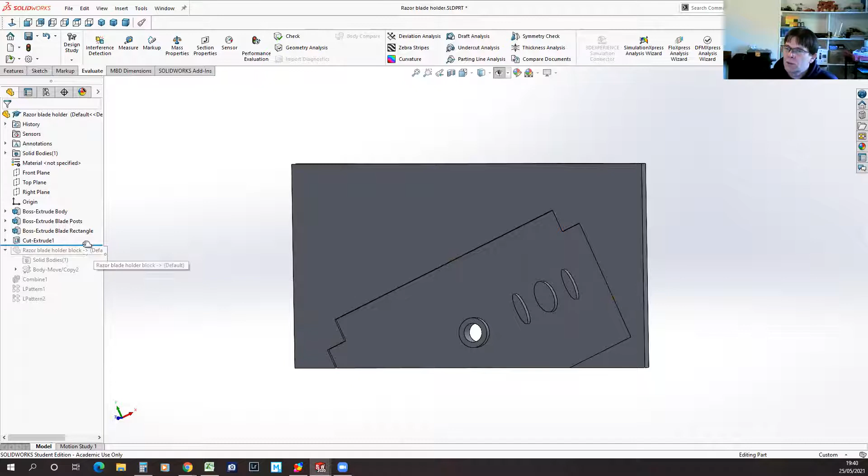And then I started looking at how to give it a profile that would enable you, when you were using it, to hold the razor blade so that you could put your finger to put downward pressure, towards the top of the razor blade. And what we ended up with was this shape. So I thought I'd start with how to generate this curved shape, and then we'll look at how I applied it to the existing model.

So if I go to the part where I actually drew that, this is the sketch that cuts that shape out of the block, and the sketch is using a spline line. So I'm going to start a new part and draw one from scratch. And we'll design this how would make most sense in hindsight. My part actually evolved over several iterations and ended up being drawn in a slightly complex way.

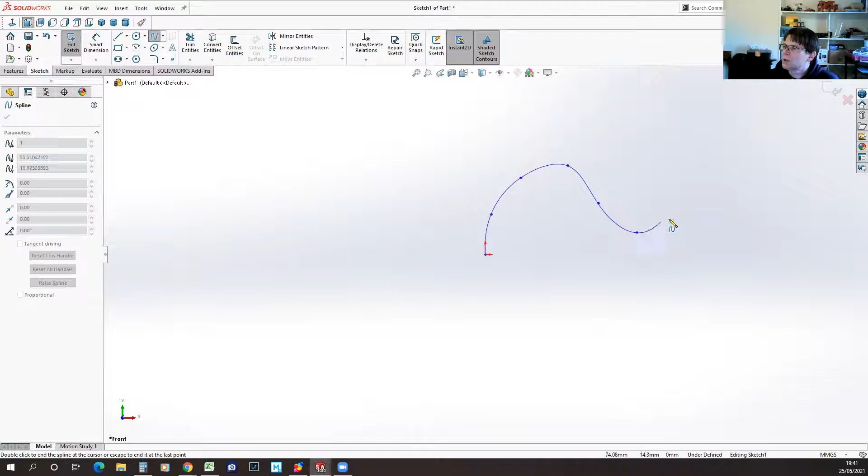So we'll start with a boss extrude, which I'll put on the front plane. And I now need to draw the shape that I want. And when I select the spline, what I can then do is click, and you can see that a spline is a curve that joins between points in a smooth manner. And I double click to finish.

And because I need a closed shape, I'll just join up those with a straight line. And then I can exit the sketch, and that can be extruded into a solid. So the spline enables you to make these very free-form organic shapes.

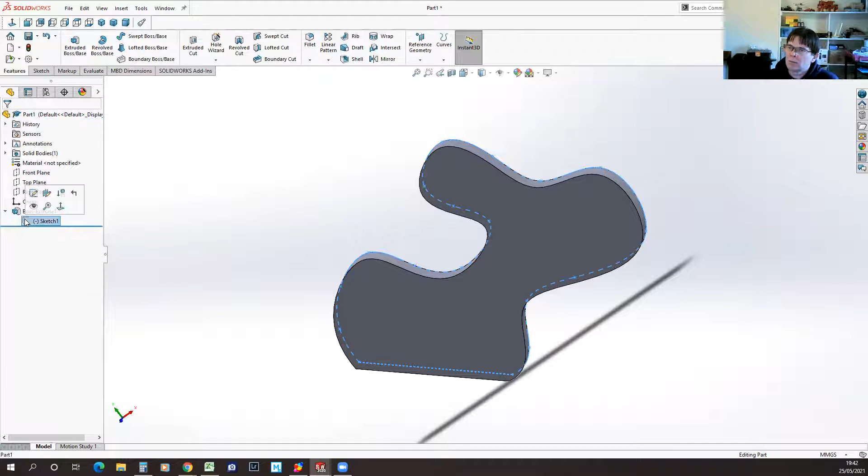Now, as is often the case in CAD, if I just go back in and put a dimension on that bottom line, if once you've drawn your shape, you decide that you want to change that dimension, there's no predicting quite how the rest of your shape is going to adjust when you've changed one aspect, if all of these other points aren't fixed.

So our endpoints are attached to this line, so they've obviously moved apart to match the change in the dimension. The rest of the spline, there's nothing fixing any of these. And so you can end up with a lot of points which you need to drag to adjust to kind of reshape.

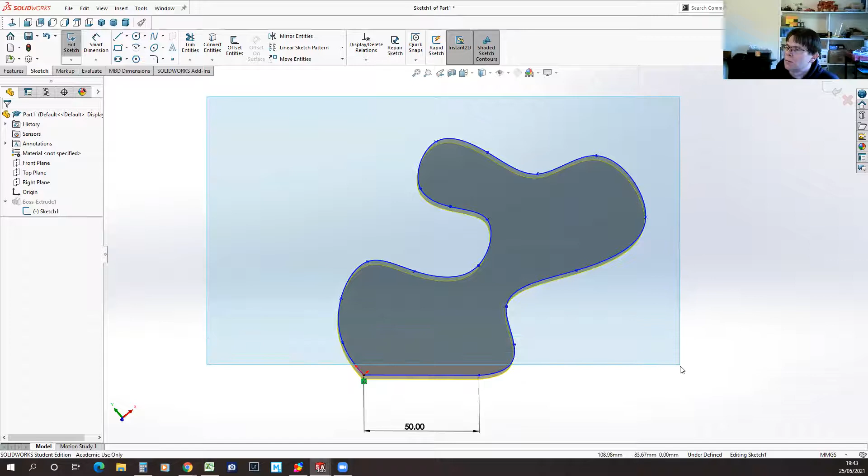So I've drawn a lot more spline points there than we had in our original model. I'm going to delete that and redraw a more sensible spline. So we had a shape that had a slight indent for a finger to go into, and then came down to a point like that. I'm just going to get rid of the dimension.

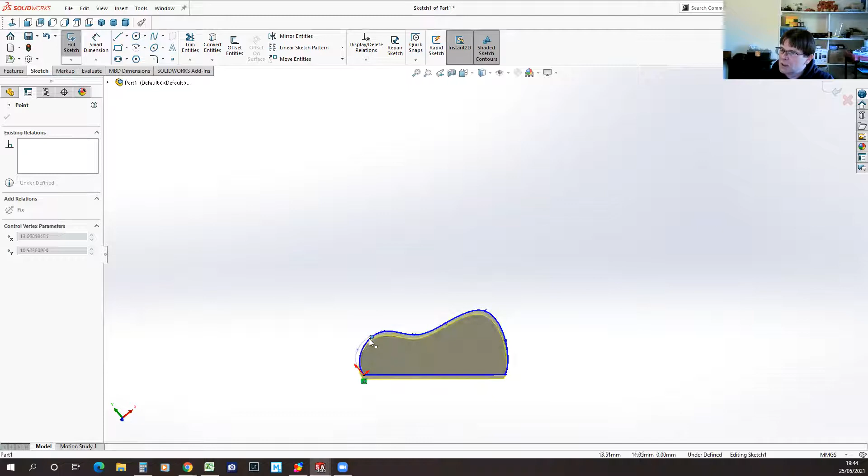Join that up. So what we want to do is constrain our spline. First of all, we want to essentially make the adjustments to get the shape a little bit more how we actually want the final part to look. And that's the nice thing about splines, is they're very adjustable.

I'm going to make that line horizontal to lock that. And it's not happy because that line isn't horizontal. I just realized that I've managed to rotate my axis. That's actually horizontal. And to try and rotate and move this whole shape now becomes quite cumbersome and painful.

That's interesting that you can't just select all of them and rotate it. Yeah, I don't know if that is possible. It would be really handy if it was. I've definitely found with splines, you save a lot of work if you get them kind of roughly right the first time.

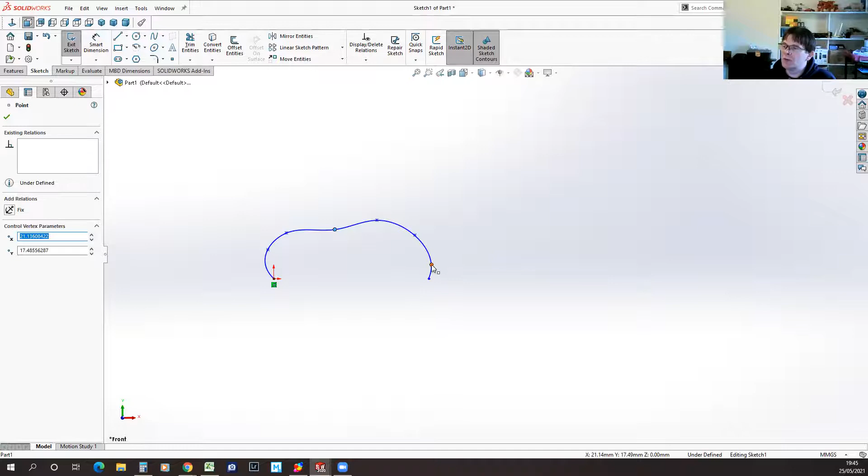Have you tried using something like Illustrator to import the lines and shapes and then extrude from there? I haven't. I don't know, there's a whole area of SolidWorks I've not played with, so it may well be that there are ways to import SVG or other vector drawings. I use Inkscape, the free vector graphics program, and that has really nice spline curves with adjustable curvature points, the types where you just click and it auto smooths everything between them.

Sure. Let me just put the dimension back on there. About 55.

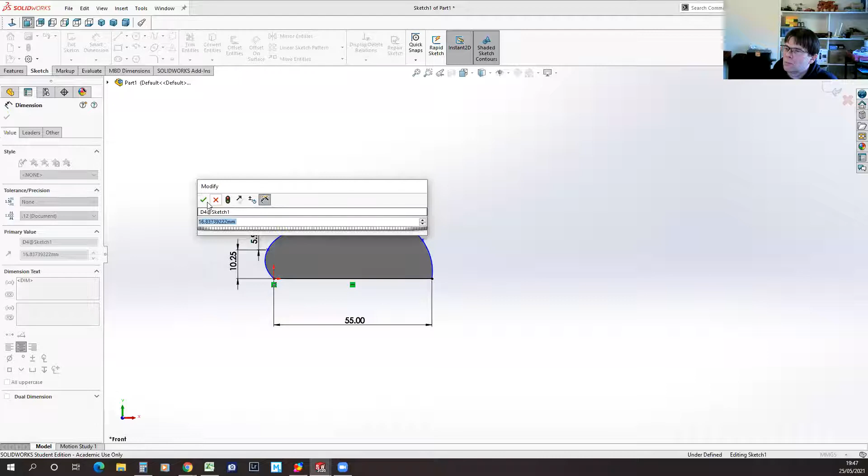So if you want to completely define your shape, then what you actually need to do now is dimension all of these points. I won't do them all because it'll take a while, but they need to be dimensioned in both directions to fix them. You'll see that when they're fully defined, they'll go like other shapes, from blue to black.

Just zoom in on that one. So that one's now a black cross at that point because it's fixed with respect to the origin. This one's still blue, I've fixed it horizontally with respect to some points, but you get the idea. You need to put dimensions to both its horizontal and vertical position in order to fix it.

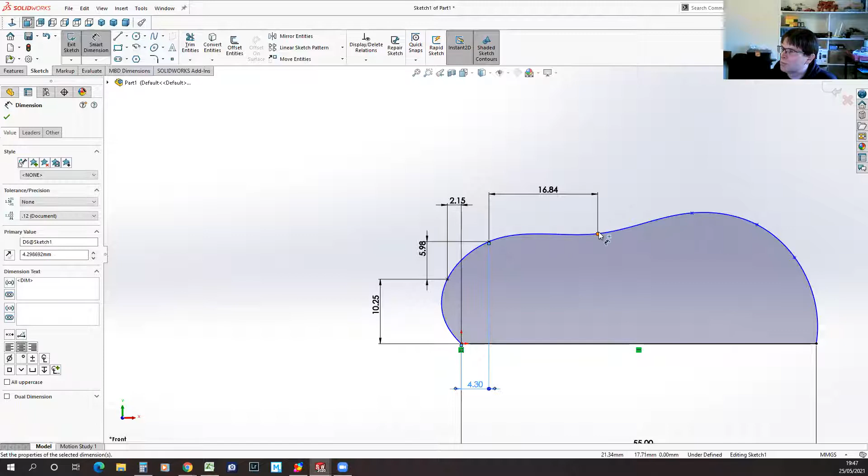And then once they're all fixed, the shape will behave more predictably when you adjust it. Now, if you want to actually make things scalable, then you need to start using equations, and say that if this length, we define this length as a variable, then we could say that this piece should be maybe a third of the way along this length. And so we define the dimension from here to here.

We define the dimension from there to there relative to the value we'd use for this dimension. That's something we went through in a previous session about using equations, so I won't repeat that now, but we'll look at equations towards the end of this session on another part. Let's assume we've made this part fixed enough.

We're happy with its shape, and I'm going to make it a little bit thinner. I don't want it to be quite that thick. So the sensible way to design this part now would be to save that as our overall shape. I'll do a save as, and I'm going to call it template shape.

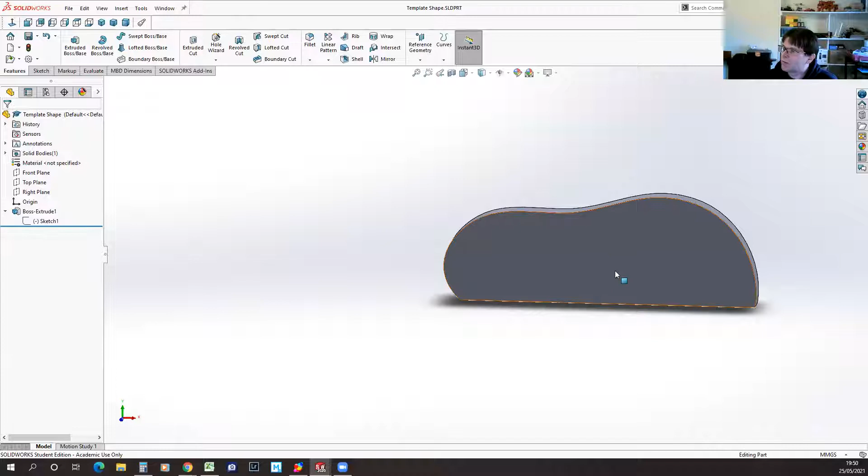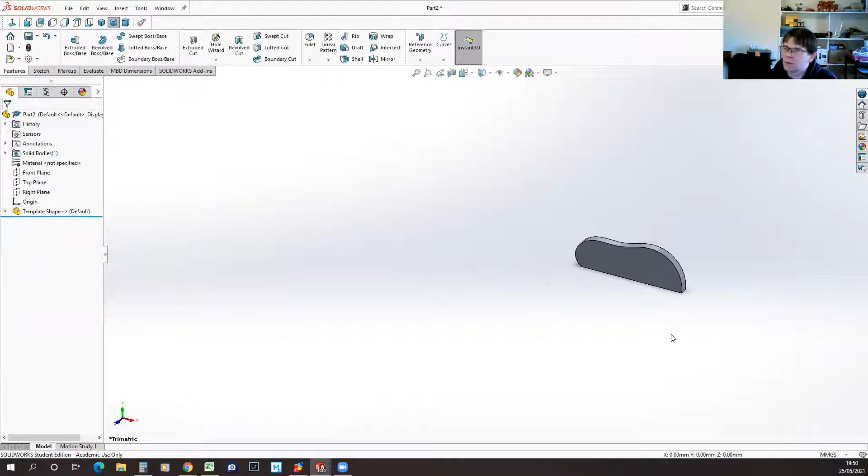Now what I can do is go into a new part and derive it from this part. So I'll start a new part, and the first thing I'm going to do is insert my other part, my template shape. It's asking me to mate it, so I'll just fix that corner to the origin, so it's happy that it's defined in space.

So I've now got a part derived from my other part, which means that first part I designed will dictate the shape of this part. Now I can start putting on the other features that will enable me to locate things. For our razor blade, we had a cut in this face, and I'll keep it simple and pretend it was just a rectangle. We'll define some dimensions to fix it in place.

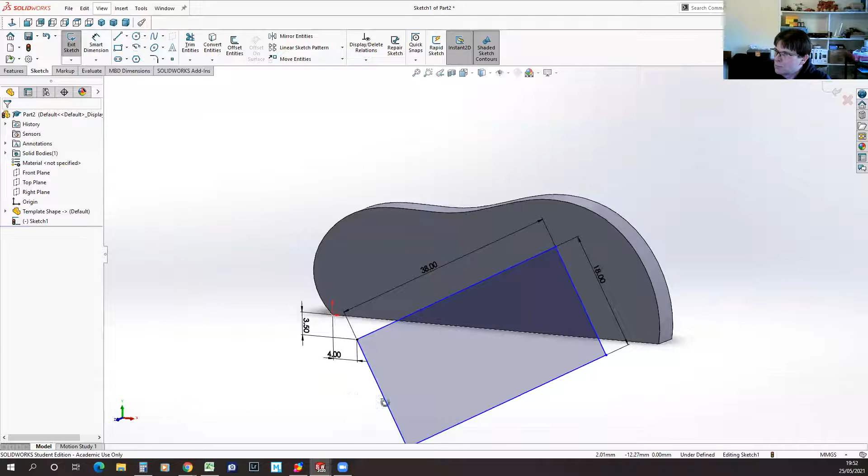It's looking for an angle because I've constrained its size and position at that corner, but I haven't constrained the angle of tilt that we've got it at. So let's put it at 150 degrees. Now it's fully defined, so everything turns black and it says fully defined down the bottom.

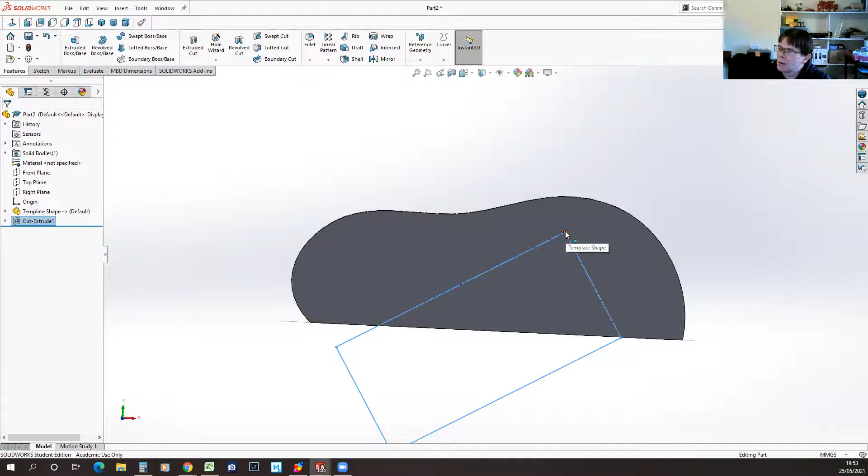Exit that sketch and make it go 2 millimeters in, just so it's more visually obvious what we're doing. Now all of the other parts which came on here were to enable us to locate the razor blade, and I had corresponding parts on my other half. I'm just going to go back in and adjust some of these.

Go in and edit the sketch properly. So I've just moved that point up and I'm going to increase that angle. Now I've put this angle on and everything's constrained, I should be able to rotate this, because I've defined that these lines are all perpendicular to each other. So it's a rigid rectangle, and this angle is the only thing controlling what angle it's at.

That's a way you can do a rotation after you've sketched something. Without the constraints, that wouldn't be possible. I want to make it a little bit thinner. There we go. That's just to give me a bit more space to put in the other parts.

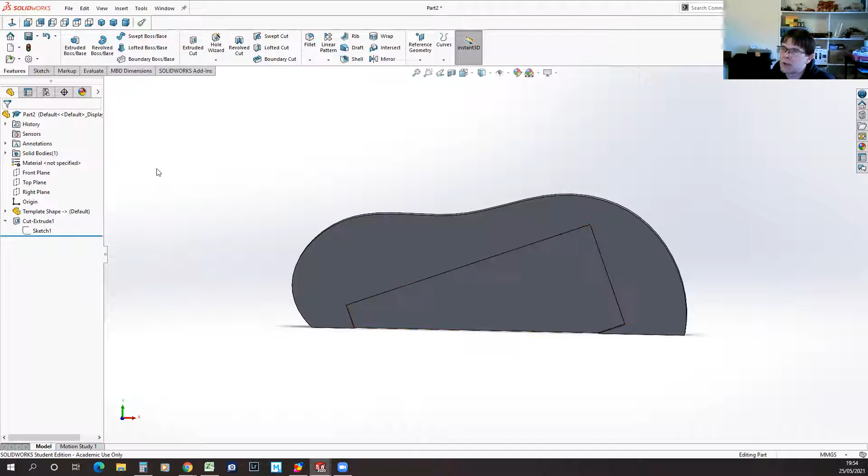The other things I had were some protrusions that would hold the razor blade in place, which I would do through an extruded boss. But because I want to actually have equivalent parts, if we go back and look at my original part, just let me shrink my windows down a bit. I've had these open on a bigger monitor.

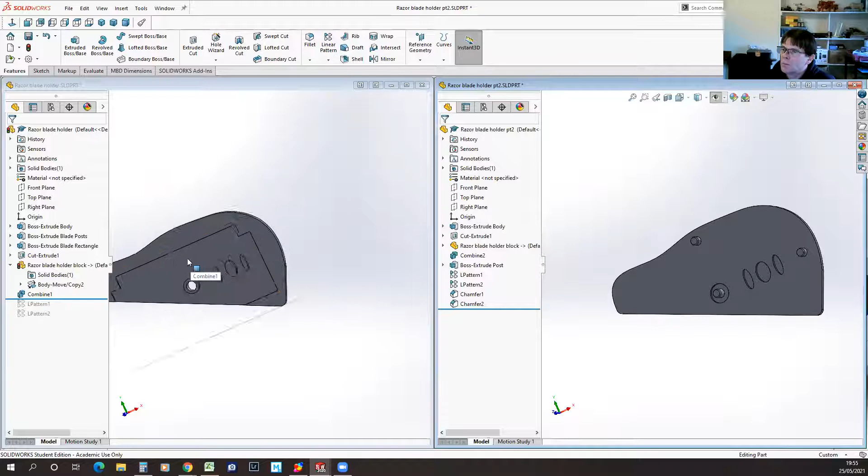Oh, I've rolled back a dependent part. Look at that one instead. So you can see these two parts, where this one's got things that protrude out, and this one's got things that protrude in, so the two plug together. That one's also got some features rolled back. So I've got these holes and I've got these pegs.

Now I want all of these to align between the two parts. And because I was just designing this on the fly, I did probably what most people would do, which is I defined them by putting dimensions on. So on this part, I said they're 24 apart, and when I was designing this one, I said they're 24 apart as well. But there's no link.

So if I went in and made those 24 and a half, on this part, they're still 24 apart. And so now my two halves don't line up, which is not ideal because you've got to keep all of these dimensions in sync between multiple parts. So a better way would be to add these onto our derived part as well.

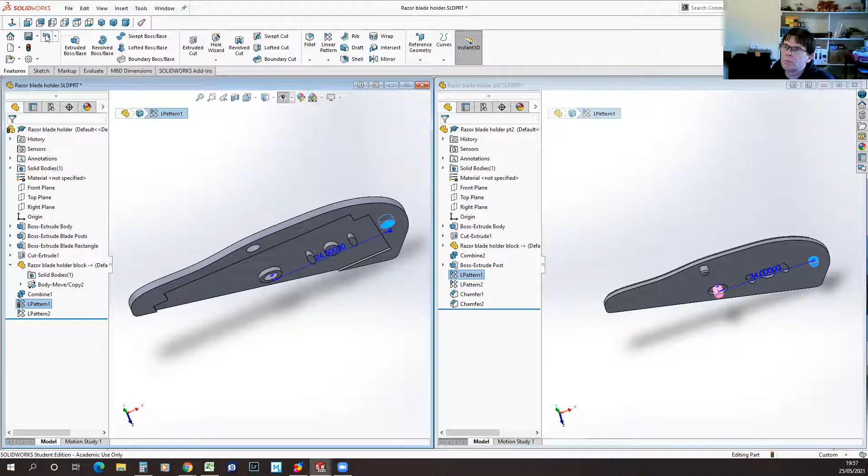So if we go back to our original template shape, what I'm going to do is put a sketch into it. I'm going to create everything as construction lines, so they're not going to actually be used for making features, but they're going to be used as a reference for attaching things. So I can make them for construction before drawing them.

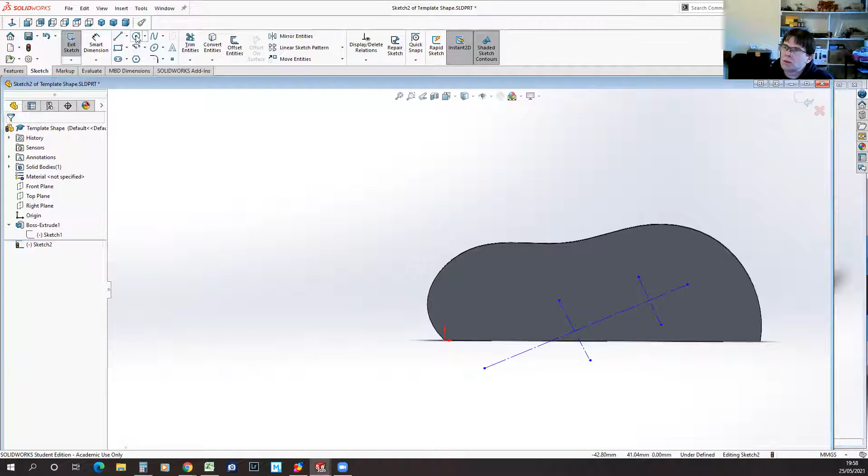Let's have a line there, and another line there. If I wanted things to all be exactly the same diameter, I could also do the same thing with some circles. Now I need to put some constraints on these so they're all fixed.

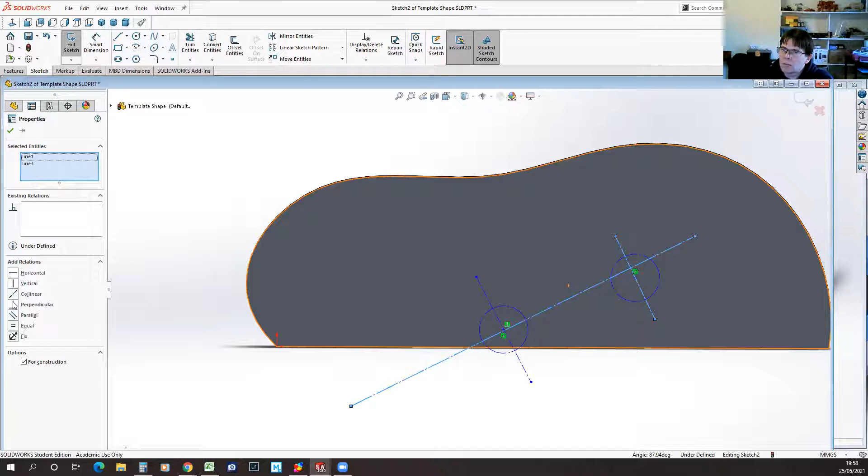So I want those to be perpendicular, and those to be perpendicular. I want to make sure that my circle is where those join. Oh, that wasn't what I intended to happen. Coincident, there we go.

So you can see as I start defining things, they turn black as they're fully defined.

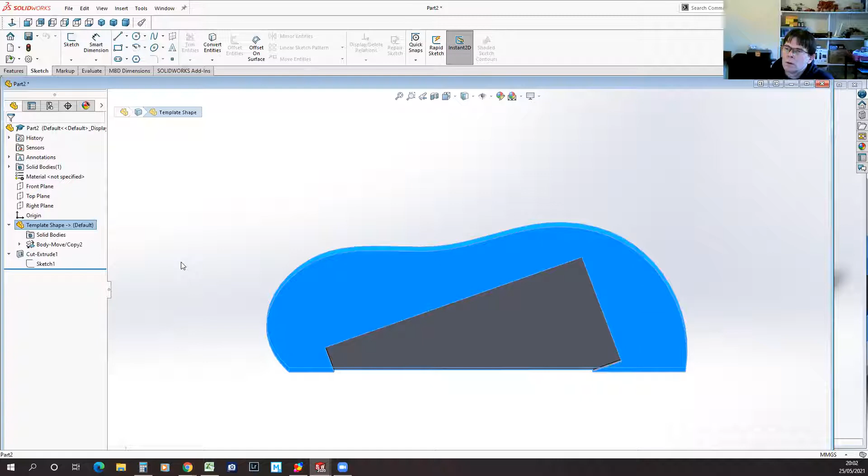This part should now contain our sketch geometry, although I'm not seeing it. I need to.

That's interesting. I wonder if I had to actually use reference geometry instead of a sketch. Let me go back to close some of those.

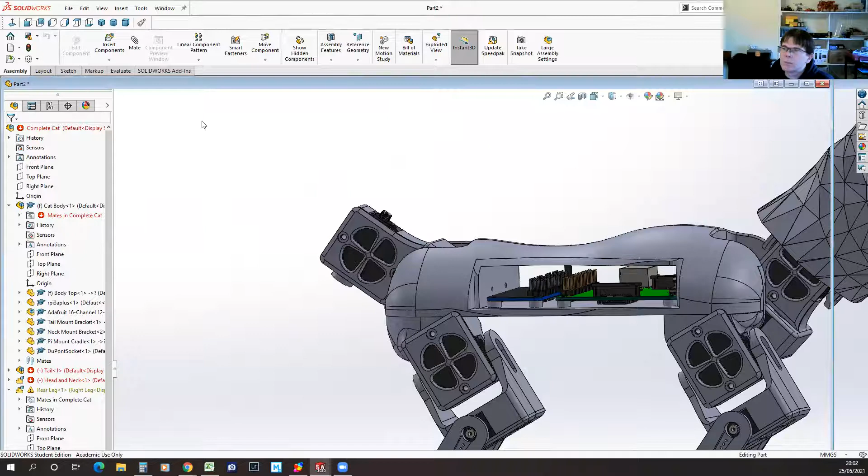I'll just check it wasn't that it hadn't rebuilt. No.

What I'm going to do is put a couple of points in attached to see if that works. Intersection. There we go.

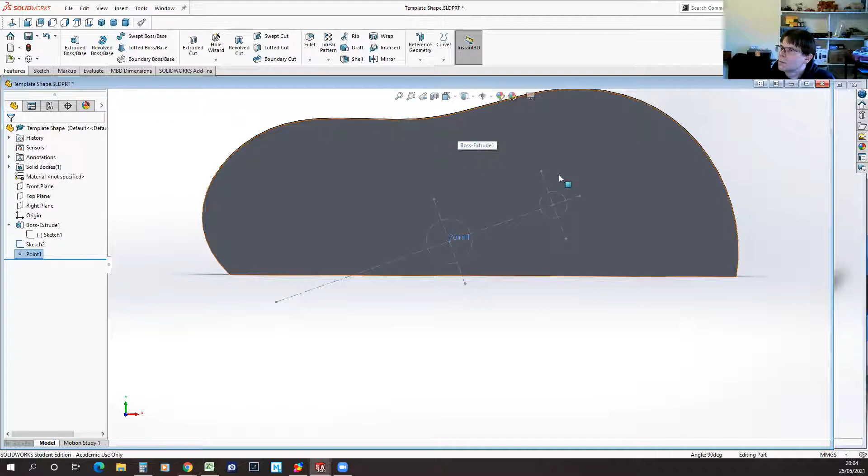Okay, that is also not coming through. So working by trial and error, what I'm going to do instead is actually make a physical feature.

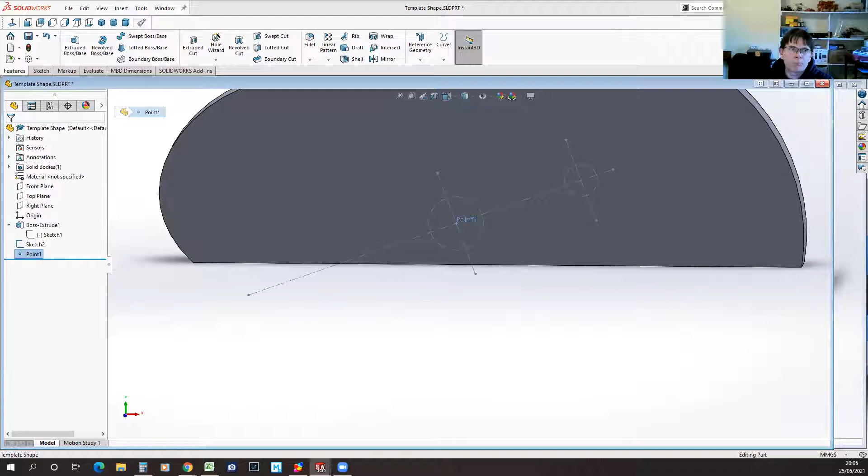Using that, and use that sketch to make an extruded cut.

I need to edit the sketch first to make that non-construction.

And I'm going to shrink these down slightly, so they're not really big holes. So I'm going to make that one 2 mil, that one 1 mil in diameter.

Now I can make an extruded cut from them. Go through all. Save the part.

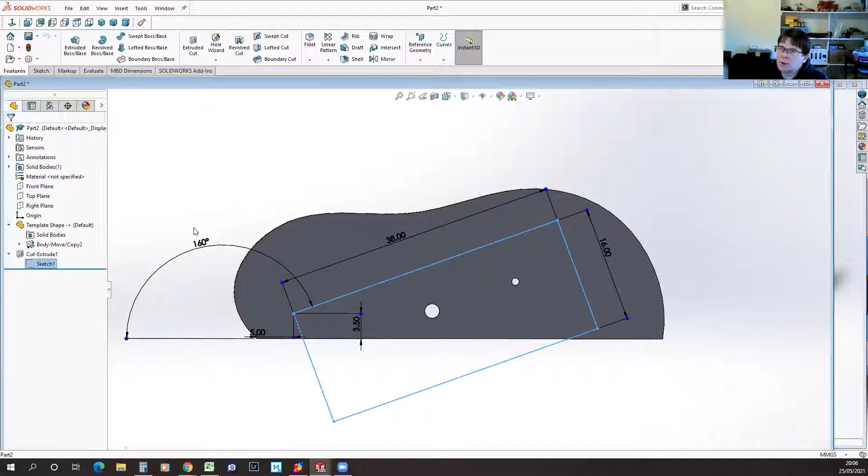All right, now the features from my template have appeared on my main part. I can now actually derive some of this information from those features. So my rectangular cutout,

I'm going to create a construction line that joins these two. Now I've got that line, I can get rid of this angle definition.

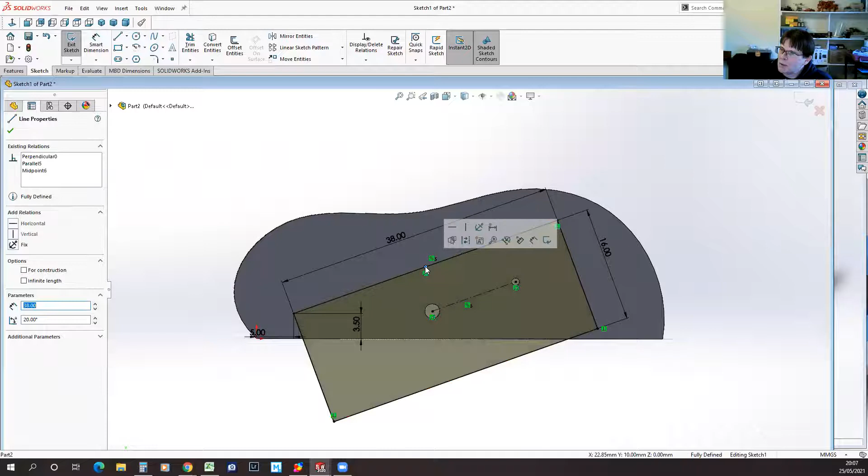Because instead I can say I want my shape to be parallel to that construction line. And then I'm going to make the midpoint of that. I can't make it vertical because it's not vertical, it's sloped at an angle.

But because my shape is 16, if I make that distance instead from that midpoint to there, I'll make it a driving dimension.

Oh, what have I done? Let me just take these dimensions off for a second.

Right, if I say that that distance - I know why it is, it's because it's made that vertical, and I don't want that vertical. Subtle difference between the vertical and the direct point-to-point dimension.

Now to make that 8, that has to force that. It doesn't have to force it unless I do the same with this one.

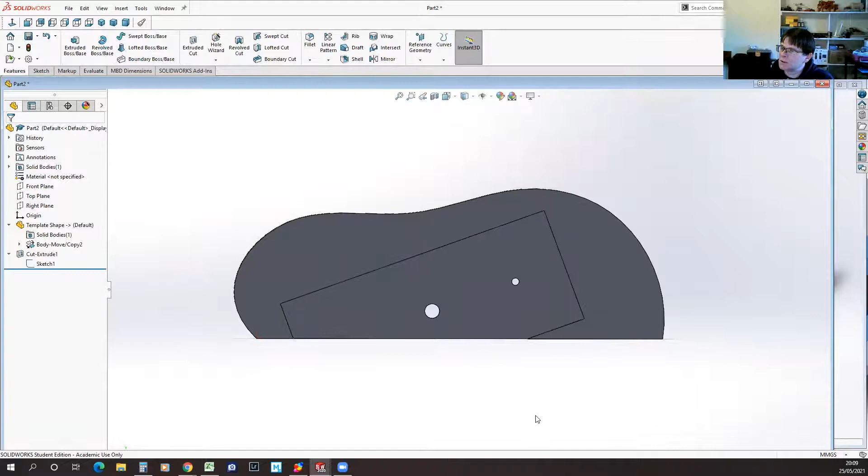Can exit sketch. And now, because in one of these I want these to be holes and in the other I want them to be studs, what I'm going to do is I'm going to do a boss extrude.

And I'll do it from the back plane, and I'll make it centered on that feature. And I'll do one on that one as well.

Let's make that one 3 millimeters, that one 4 millimeters in diameter. Now they're fully defined because they're locked to the centers of those two holes.

So I don't need any other dimensions. And then I want to flip the direction that they extrude so they come through this way.

And I want to make them 5 millimeters tall. So now those holes have disappeared.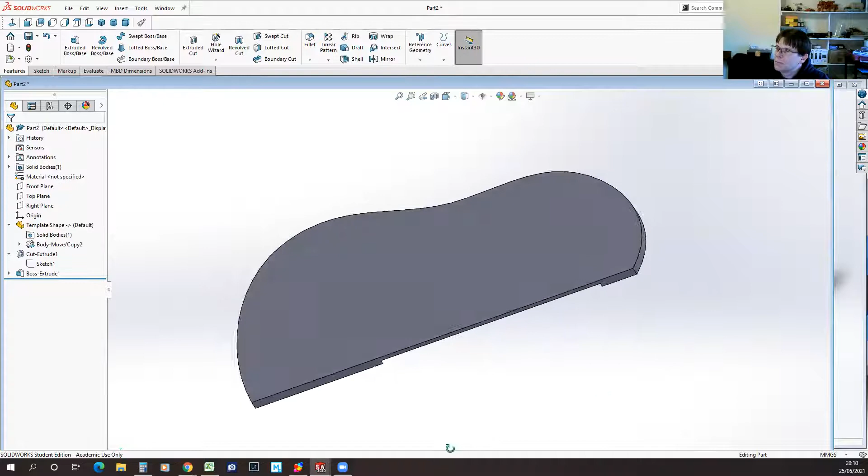I've got a smooth black plane again, but I've actually got two studs which are located based on the positions of those holes. So I can now save that.

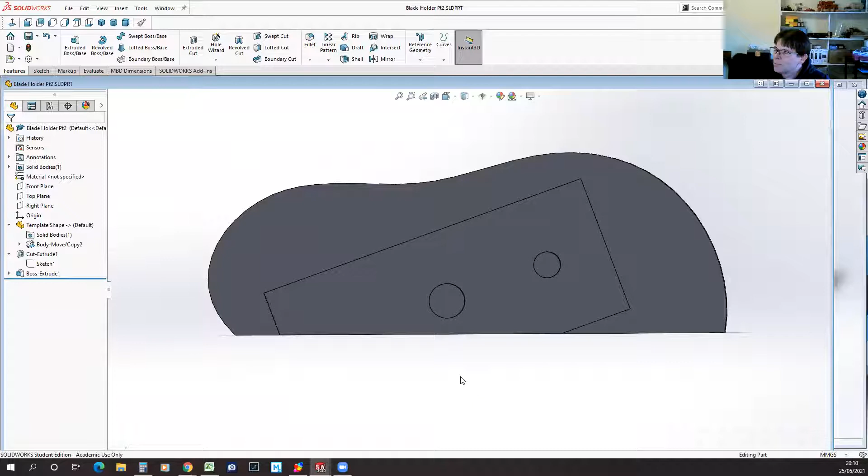And now I'm going to delete that boss extrude, but I'm going to keep the sketch it was based on. So I'm not going to delete absorbed features. And you'll see the sketch has dropped out.

And now I'm going to create a cut extrude from that sketch. So go through all.

Now I've got two holes which perfectly match up with the pegs that are on my other part. And the reality is that I want them to be slightly bigger, so I can now come into the sketch

and make them 4.4, 3.4. So there's a little bit of room for the fact that I get a bit of expansion on my 3D print.

So I've got part 1 and part 2 of my holder. Reopen part 1 because it would have closed when I.

Okay, and they will perfectly join up and join together, apart from one thing. I need the mirror image of one of them.

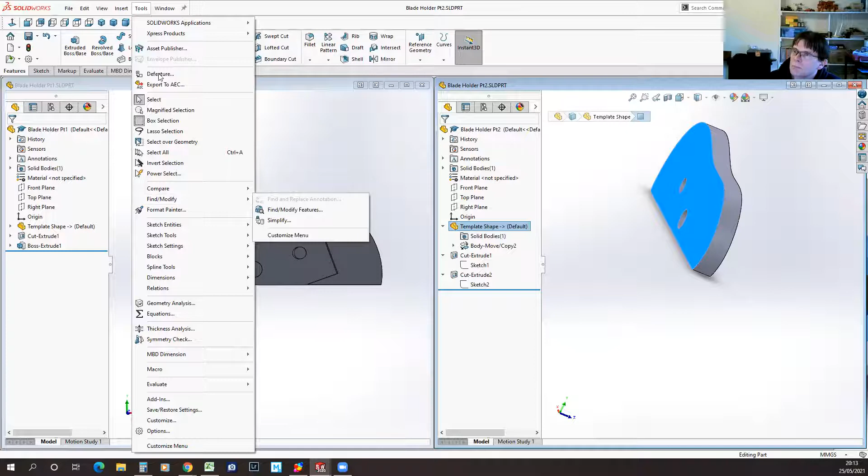Oh, it's in Insert, that's why. Mirror part. So although it's on the Insert menu, I'm not inserting something. What I'm actually doing is inserting into a new, see, it's gone to part 3. And now I've got a part which is the mirror of that original part. So I can save that, and I'll call it 2.

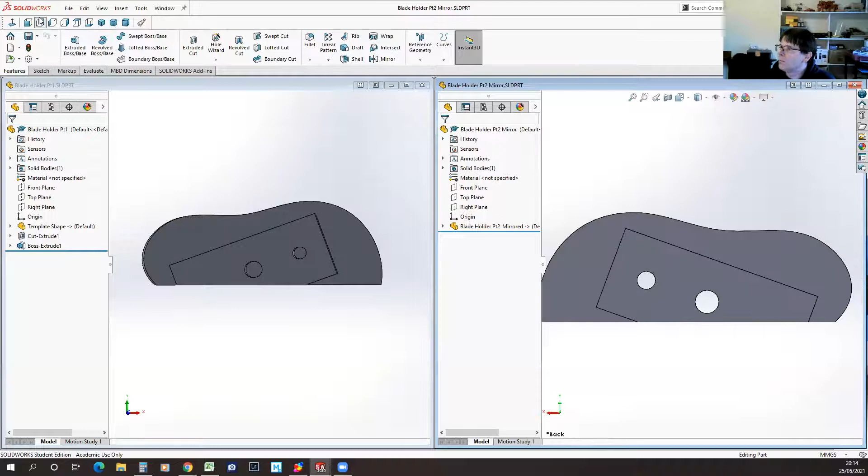So I've now got my mirror image of this part. So you can imagine that those two, if I built an assembly, would go together and those holes would perfectly line up. So I've got to the sort of end point of what I was trying to show, but the real magic is in the fact that it all comes from that derivative, from that template.

So if I go back to my template shape and decide that actually this angle wasn't quite right, I'd rather that was at 170 degrees for a more shallow slope. And I want to move that up. So maybe I will flip that dimension. That wasn't what I intended to happen. That's what I wanted to flip. So I've moved that 3 millimeters up and at a shallower slope.

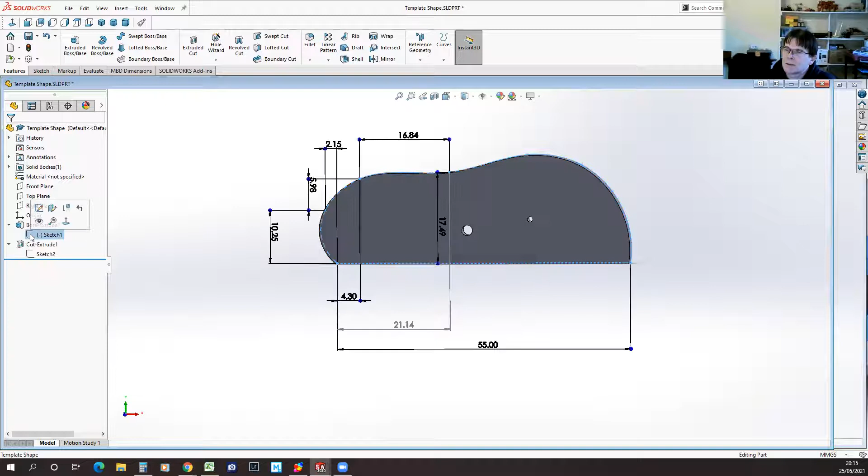And let's go into our spline, and these ones that I've not constrained yet will be easier to adjust. So let's change our overall shape to have a much bigger bulge at that end. So I've made some adjustments to my template shape, and we should see that those have been applied automatically to our part 1 and part 2. So they've now got the bigger bulge, the shallow angle. Everything still lines up because everything is derived from that template.

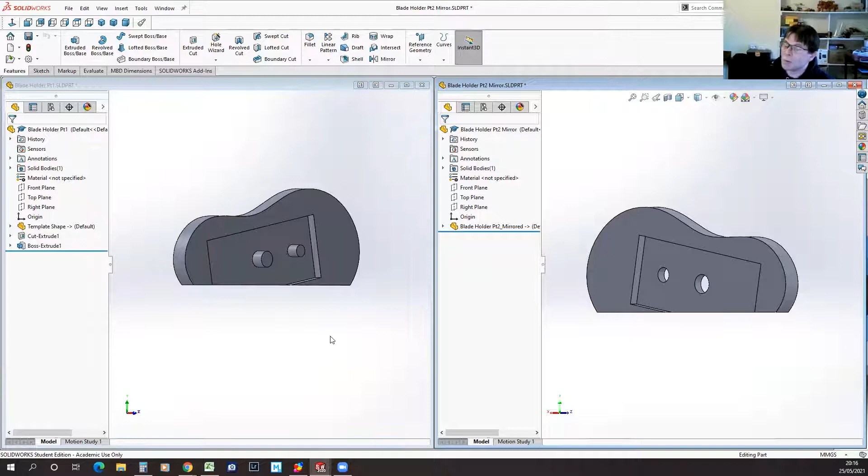And when you're iterating on a design, that saves you an immense amount of work, because the initial setup was a bit complex, but now when we print this and we discover that this groove isn't quite right, we can go and make an adjustment to that groove, and it will apply to all of the parts, because they've all got that chain of derivation.

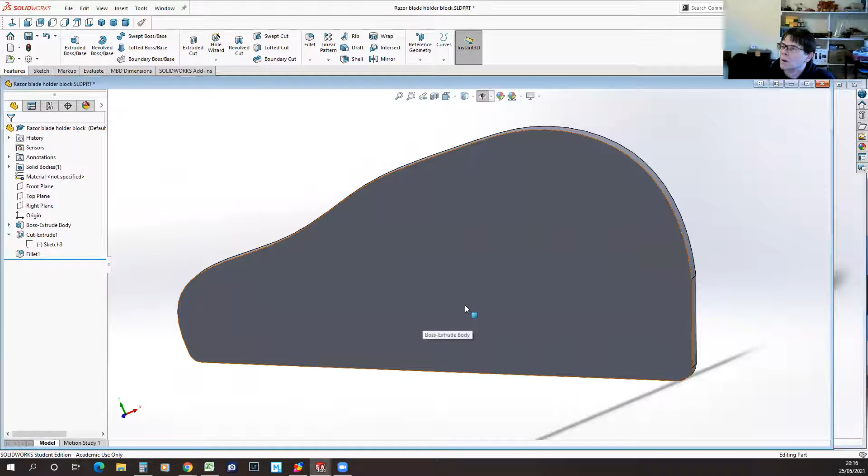Now, I couldn't build up from a template part in the same way when I created my... save those so I can close them. When I created my actual razor blade holder, because I had already designed it before I worked out what curve I wanted here. If you remember, if I roll it back, in fact, that's the part 2. We find the part 1. There we go.

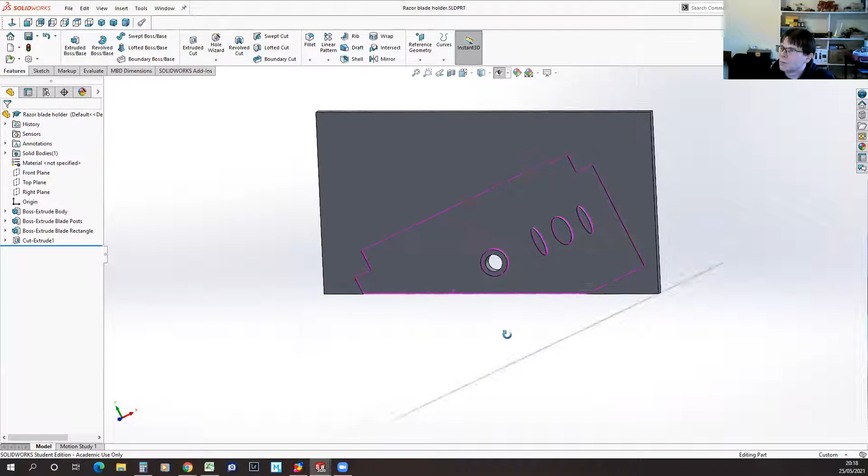I've done all of the design of this part to get the actual fixing of the razor blade before I designed the curved shape. So instead, I used a different technique where you've got a shape, and you can go and insert another part. So I'll do it with, I'm just going to save a copy of this so I don't destroy my original work. So I can go Insert Part, and what I'm going to insert is my template shape.

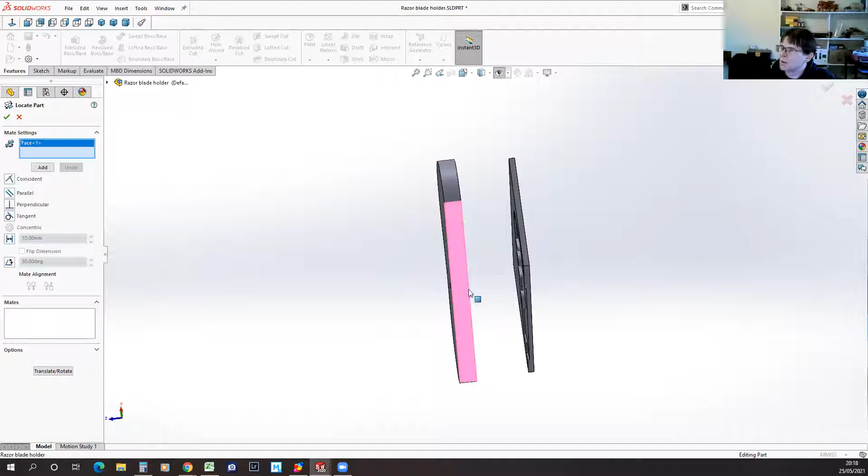You can see that initially it's just free floating, but if I select Locate Part with Move Copy, then now I can create some mates. So what I want to do is say that this bottom face is aligned and this rear face. Oh, I've closed. These two faces are coincident, and so at that point and at that point, I want to be five millimeters separated.

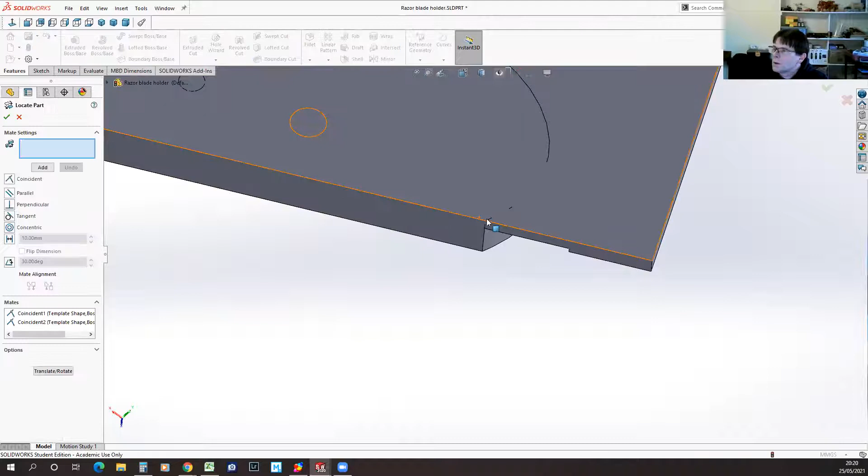I don't quite understand why that won't let me flip that dimension. Let me delete that distance. If in doubt, try things a different way. Let's go and edit this one, that one. Okay, my shape's slightly longer, so that's why I can't quite fit that in. Instead, let's just go and make the original slightly longer. There we go, so it fits entirely inside.

So I've essentially inserted that second part into my project. So this is what we designed. And then I've said, insert that. What I can do now is I can go into Tools. Is it under Tools or is it under Insert again?

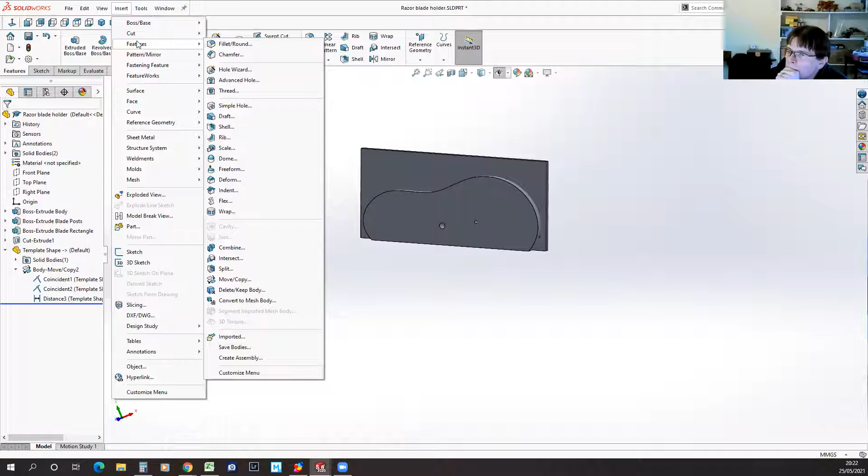There it is, staring me in the face, combine. So what I'm doing is combining two bodies. So if I open up my feature tree and find the solid bodies, I've got my original and I've got my template shape. And what I can do is decide how I want to combine them. And in this case, I'm going to say that I want where they have common overlap. So tick that. Can you see that all of the part of my original part, which doesn't overlap with that shape, has disappeared?

So what I've been able to do is take an existing part that I've designed and change its profile by inserting a second shape to make a common operation. You can also do an add or subtract. So if I do a subtract, then what it does is it cuts the one part away from the other, as you can see.

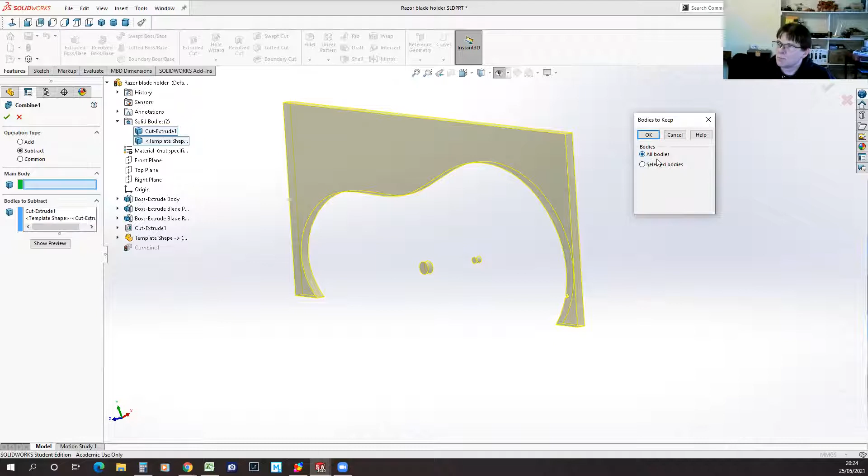Oh, the dialogue opened on the other screen. And then I can decide, do I want to subtract from all bodies or just selected bodies? I'll just say all bodies. You can see what's happened is it's actually removed one shape from the other. So that shape combination is another powerful way that you can build up these derived shapes.

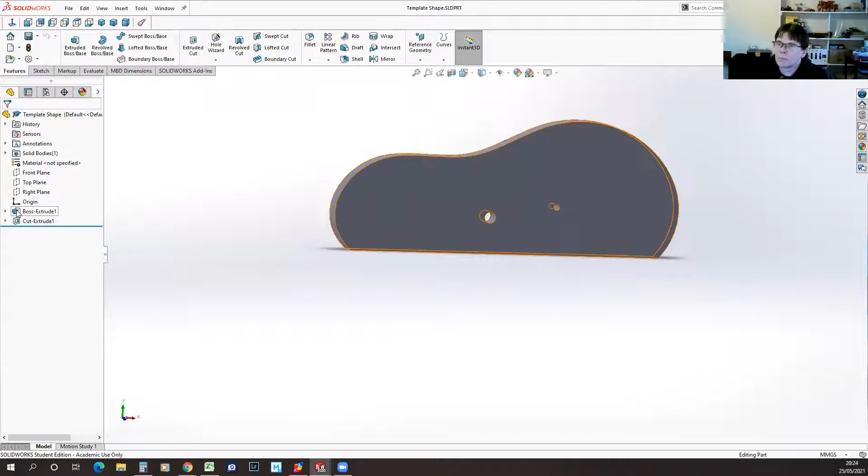I somehow lost the selection. There we go. And just to prove that that has done what we've said, if I go back to my template shape, and we make some obvious changes to the shape.

You can see the little rebuild icon, traffic light icon has appeared, which means it's not actually applied that change until I hit rebuild. You can see. So that template shape again is defining the shape of this part and any other parts that I do the same operation with.

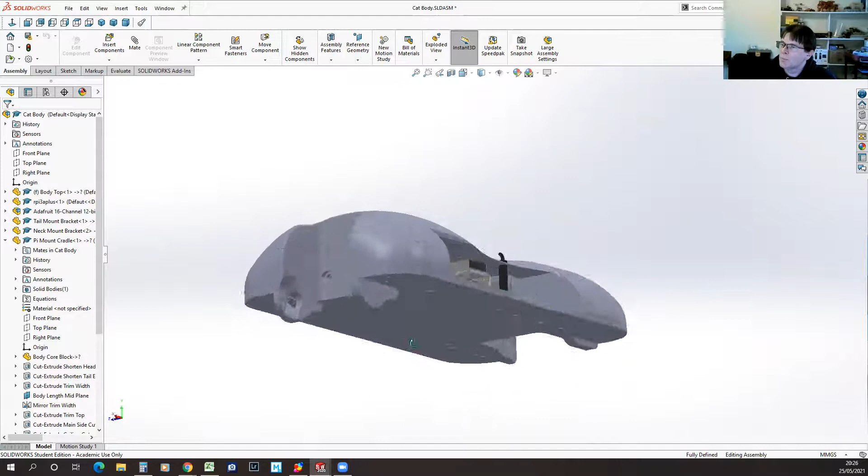And just to show you how powerful this technique can be, I was working on a project to build a robot cat, and I designed this body shape for the cat, and I wanted to make it modular. So where my servo brackets were, for example, to make this thing easier to 3D print and to 3D print the complex parts separately, because I wanted the smooth curved surface to be facing up on the print bed. But I didn't want to have to build a load of supports around this complex geometry.

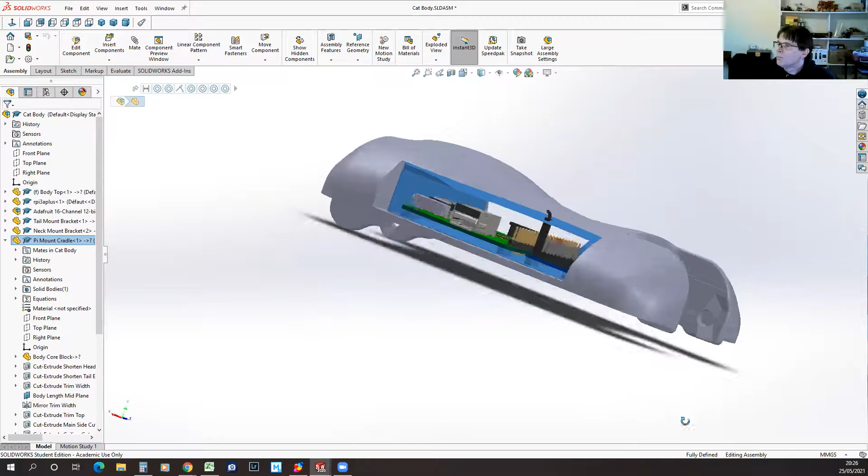I wanted to print the bracket that was this part of the body as a separate modular part. But I wanted all of these curves to perfectly line up. And so I've used this technique, and I've done it again with the cradle that would hold the electronics. You can see the part that's now colored blue. When it's not highlighted in color, it perfectly lines up contour-wise with the others. And of course, I've done that by using the same techniques.

So if I open up that cradle, you can see that it's actually derived from a core block. That core block was the shape that the overall cat body was going to have. What I did in this case was I topped and tailed it with some cuts, trimmed the width, and then built up all of this complex detail, but the actual exterior shape of it perfectly matches the overall cat body.

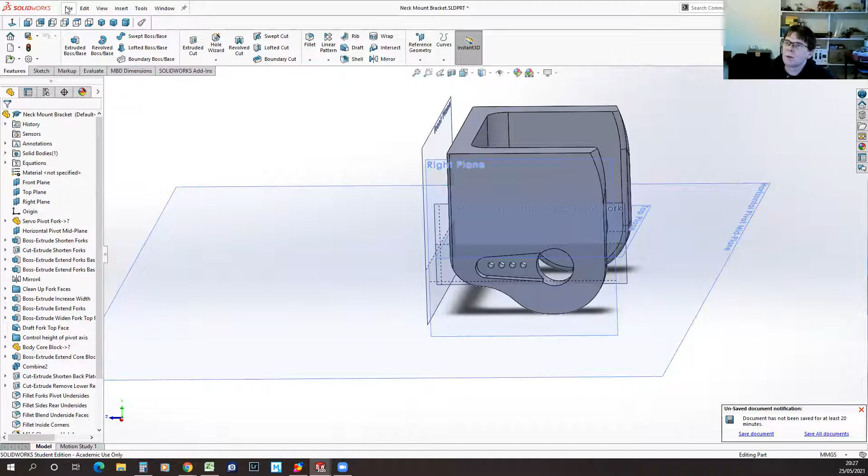Likewise, this part. Now this part is taking this technique a step further, because I've got a lot of servos in this robot cat. In fact, if we open up the complete cat model, this is still a work in progress, so I haven't finished this project. It's just going to complain that none of the fixings are available in this version of SolidWorks. So all of the mates of the fixings are broken, but that's not relevant for here.

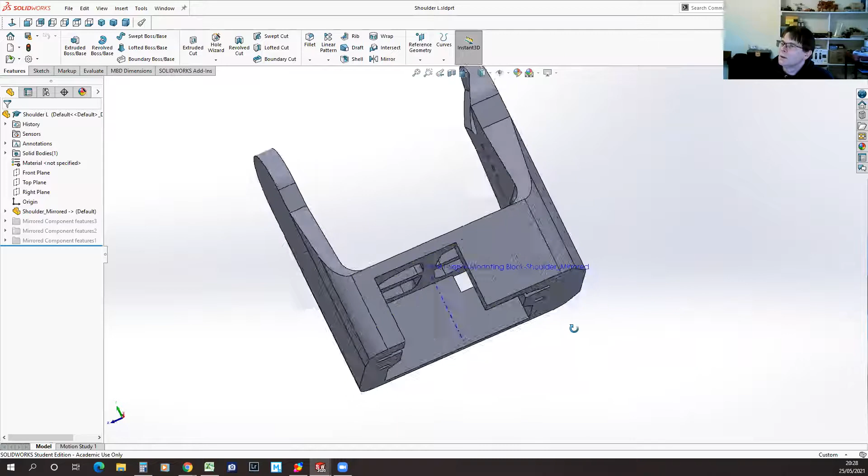So there's a lot of servos, and they all have a common kind of core fixing shape. So if I open up one of these, all of my servo holders have this common cutout, which is to tightly fit a particular brand of servo that I've picked. And they also all have this particular configuration to hold the servo horn of the adjacent servo that will make up this joint.

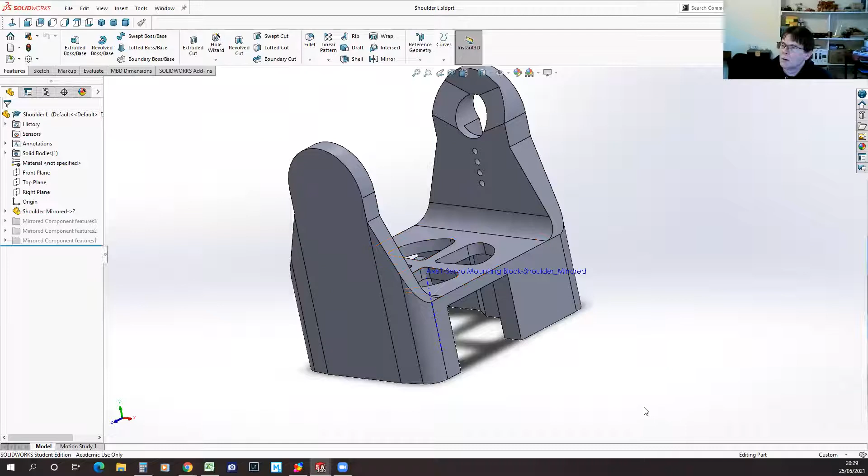And this has come from a mirrored part. So let me open, and it's not going to fit the wrong shoulder. Let me go back. Close some of these. Let's try one that isn't derived from a mirror. Of course, that one is as well, because I've, okay. Let me go and open the originals directly.

Try that one. No. See if I get lucky with this one. There we go. So it's a different part, but it's got the same principle. It's got this core block that, if you look in my, I'll just roll back right to the start. This is my core servo block.

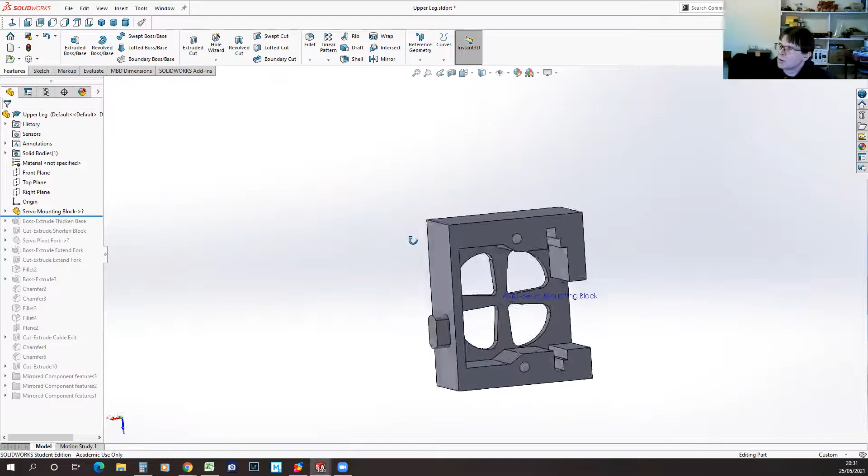So all of my servos are held in this particular shape. So I created this as a separate part. I then adjust the size of it. In this case, it's just very, very subtle, but it's making the base slightly thicker. And then I'm trimming a little bit off the end.

And now I'm inserting another part. So this is my other base part. All of my servos that attach via their servo horn fit into this shape. So I brought one of those in and put it relative to where I want.

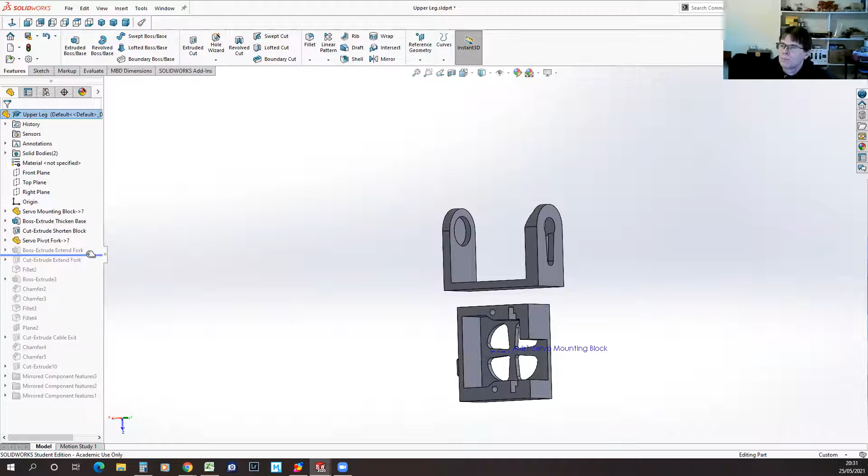And then I just make a whole bunch of adjustments to kind of build the part out and then do all the filleting and trimming. So we end up with a neat part, but if I need to change the shape that holds the servo, or the width of these forks, or the position of these screw holes, or diameter, anything to do with those common parts, then they will propagate through the entire CAD model.

And you can see there's a lot of parts which have those common features. They're all different shapes, but they all have those forks. There's more in the cat head, it has one in. The actual body has those forks. You can see where the tail servo is. So these modular parts that we were looking at are part of the cat body.

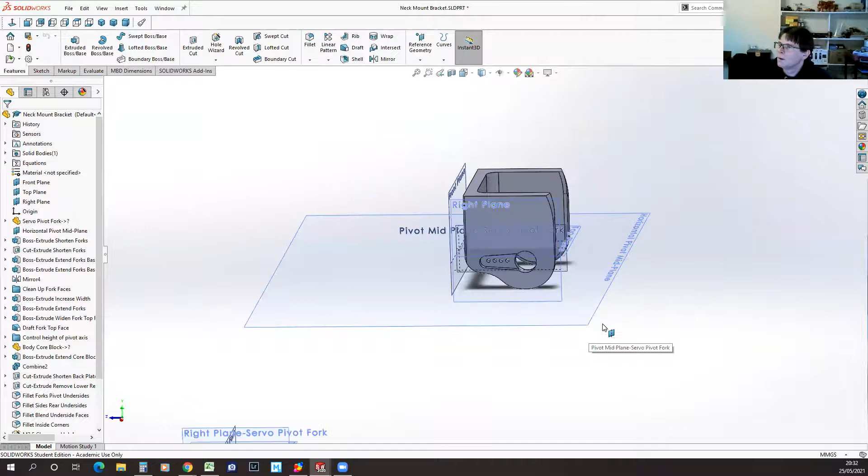I'll open one of these up. You can see this one at some point, if I roll it back, was derived from my common servo fork. And then I built it up until I had the dimensions I needed to fit into my cat body. And then you can see that I bring in the cat body in position, and then I do my combine.

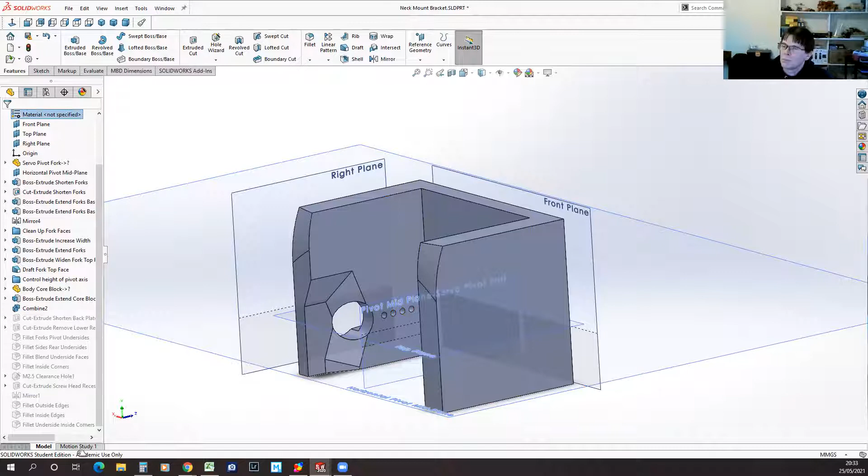And what I've done is I've subtracted the cat body. So the difference between before and after is just the subtle curve that gets chopped off. So it's not doing a lot, but the curve of the cat body is trimming the back of this bracket. And then I build up the rest of the shape. So I've got something that I could nicely 3D print, probably in this orientation, without needing to use supports.

And then it inserts seamlessly into the cat body. That one. So you can see it when it's colored blue. But when they're all bolted together, it'll look like one seamless part. So it's a very powerful technique that the more I've got used to the complexities of it, the more it's paid off. Because if I want to make any change to the shape of this overall cat body, then it will propagate to all of these parts. So all of these curves will be perfectly aligned.

When I started this, I was using manually drawn curves, and it was killing me.

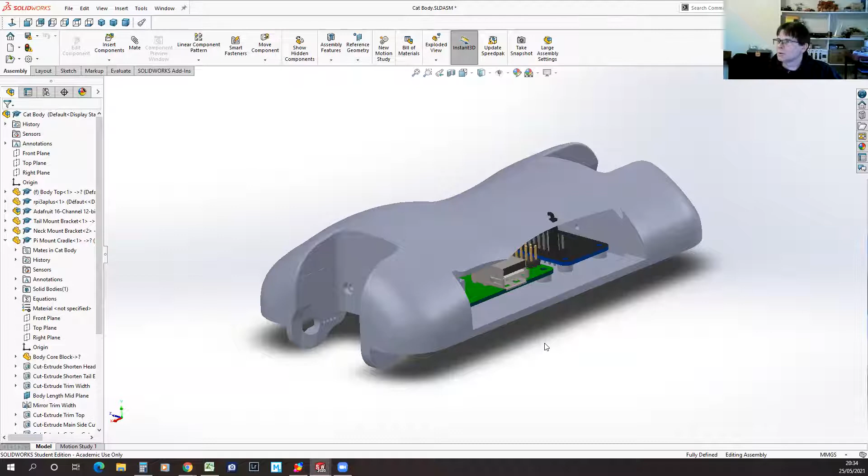A question about your cat robot model. How did you draw the head? Because it looks very realistic. Or how did you design it, was it something that you got from somewhere else? It was from somewhere else. Oh, I spent a disturbing weekend in CAD beheading a cat.

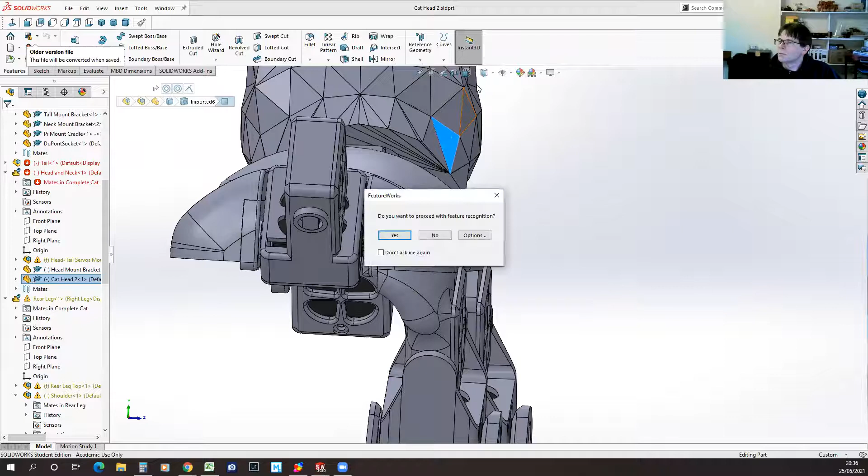Let's see if I can find the cat's head. Okay, that's maybe not the file. Let's go back to the complete cat and open the part I'm actually using. So there's the cat head. I kept this simple and bolted the servo bracket in as a separate part. So it's just got two holes for bolting the bracket in. But if we roll it back, actually I've already derived it.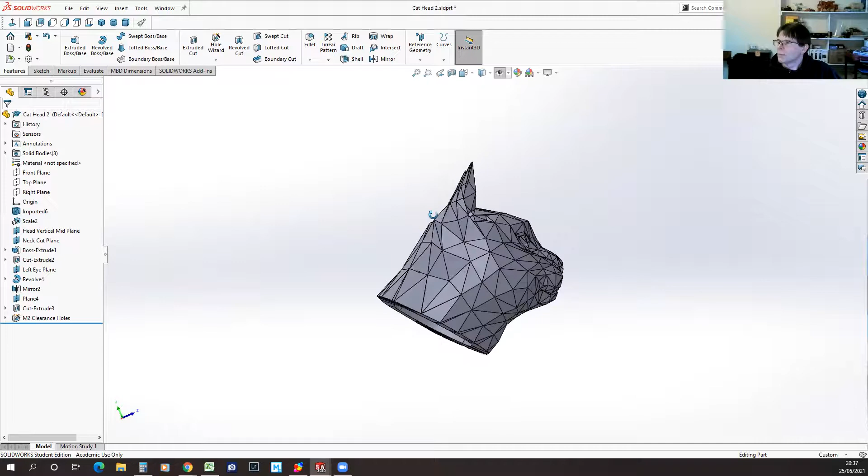So you can see that the first thing I've done is a scale operation to make it the right size. I originally started with a cat that I found on a website called Turbo Squid, and it was a complete whole cat. And the reason I was looking for a cat head, the original robot cat design is actually called Open Cat, and if you search online, you'll find Open Cat as a fully 3D printable robot cat, but it's very skeletal looking. It's robotic rather than lifelike.

And so what I did was I took the basic idea from it and started trying to build a much more shapely looking robot cat. And the head they had was very low poly, so very few triangles, and it looked much less lifelike. And I came across a website called Turbo Squid, which is a 3D model sharing website. And on there, someone had published royalty-free, with a license to use for derivative works, a complete cat model. And I imported it. It was a triangular mesh file.

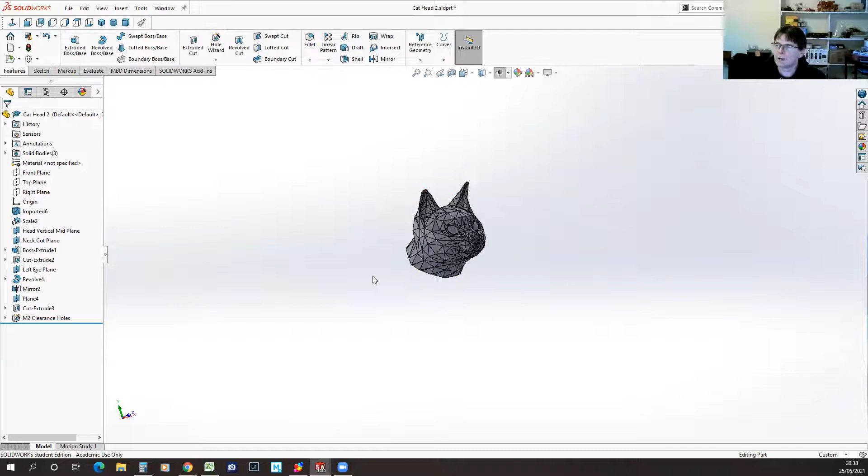So I imported that and had to do quite a lot of processing on it. But I kind of cut its head off with a plane. And then because the file was absolutely massive, I think I saved it out as a poly file and then re-imported it. So you can see I've got imported at the start, so that I was able to throw away all of the data for the rest of the cat's body, because that was really weighing down my CAD model and I didn't need it.

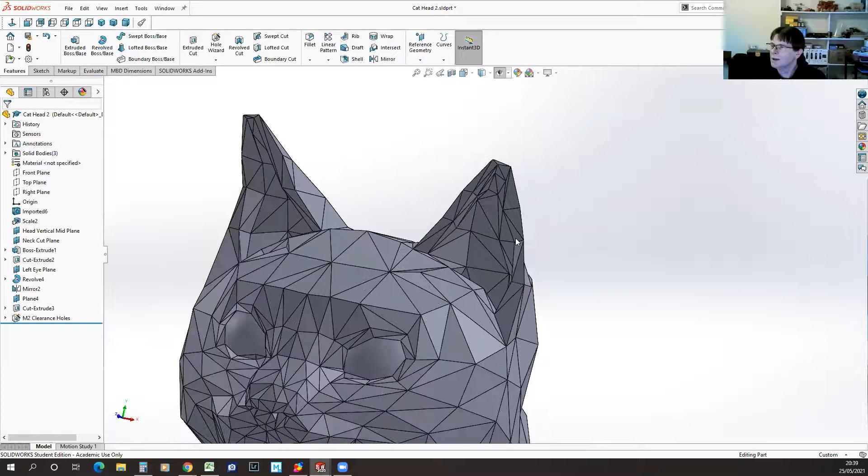And it still needs more work because it looks really good here, but when I 3D printed it, it looked like a kind of alley cat that had been in a fight, because some of these points on the ears, can you see, they go to almost zero thickness? And so with the 3D print, what happened was you ended up with little notches out of the ears where those bits didn't print right. And it looked like it had been in a scrap with another cat and had its ear chewed.

Oh dear. But yeah, it's a project that has been parked in a box for the best part of a year. But I will get back to it at some point and finish actually printing it. There's a lot more parts I wanted to design. I've done some of the parts. I'll go back to the model.

So some of the parts look more lifelike. The legs are still very much how they were originally, except I designed these more realistic cat's paws because the original just had spheres. So I designed something that looked a little bit more paw-like, but I don't like how they go from thin legs to really wide. So I want to try and build some more shape into the legs.

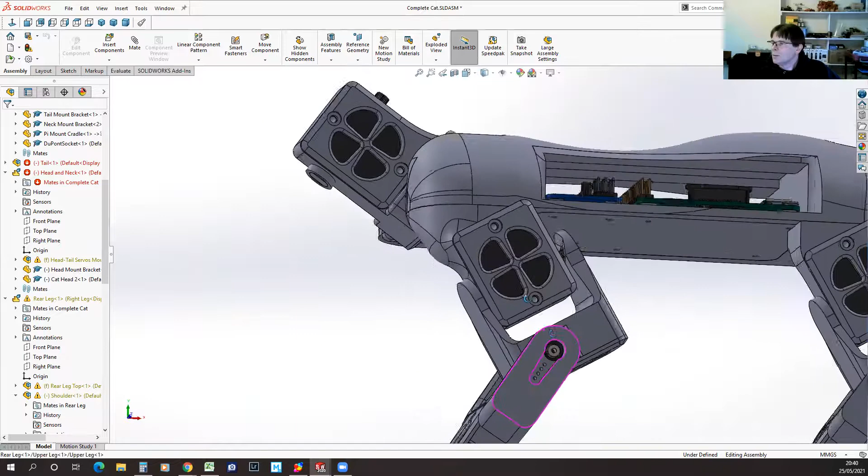I've done it on the shoulders. You can see how the shoulder servos have got a more muscular, lifelike shape, but the rest of the legs are still quite robotic, and there's plenty more work to do before it's a finished project.

I guess the easy part will be when you program it to ignore everything you say.

Yeah. So the programming part is going to be a massive project in its own right, I'm sure. What I'd actually like to do with it is find some way of getting feedback from the servo positions so that I can pose it and have that feed its position back into the software, so that I can do some kind of empirical kinematics, if you like, take it through some moves by manually positioning it, and have those be recorded for playing back, so that I don't have to completely write the movement routines programmatically to try and make it lifelike.

So are you planning to use the tail for stability, for example, as well, like in a real cat? So there will be a tail. Whether it will be there for balance or just for looking nice is one of the many unanswered questions of the project.

It was a project which really pushed my CAD learning, and it will really push my robotics programming when I get to that phase as well. But I learned enough CAD from it that it inspired me to work on some much simpler projects, which have been enabling me to actually finish something. And I'll come back to this as I increase my skills and have more time for it.

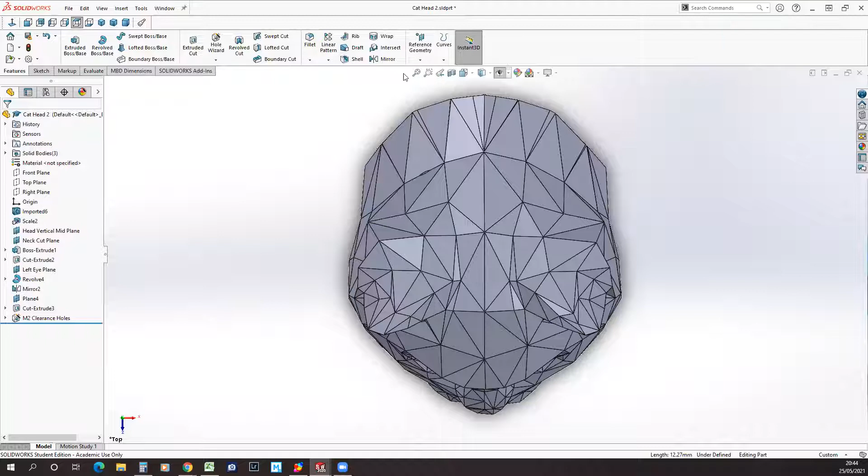If you wanted to create slices of this, what you'd probably want to do is get the top-down view, and we can do it visually with the section tool. If I section on the top plane, I have to actually rotate it to grab the grab handle. But each of these contours that you see is in effect the slice. So what you would want is some kind of script that would go through and take the contour and generate each slice. It might be possible to do it in a CAD program, but it might not be the easiest way to achieve it.

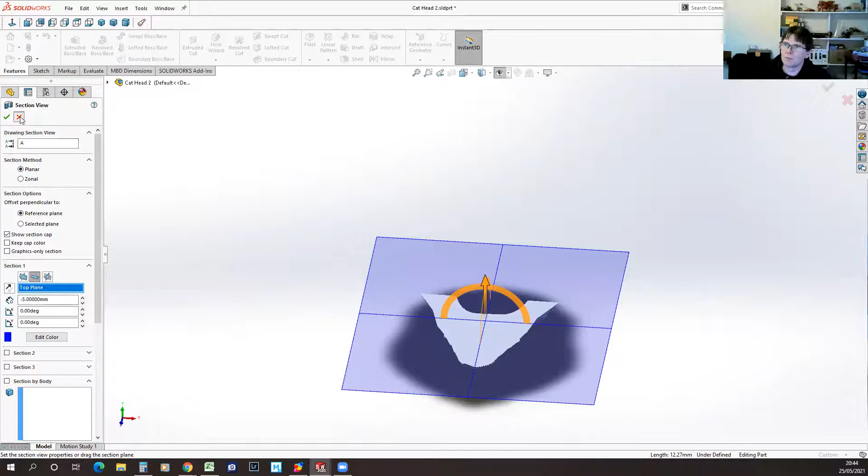Okay. What I have done with CAD and laser cutting is built things up. If I come out of that. This was the project that got me started in CAD. And it's going to complain because there's lots of fixings which aren't present in this version of SolidWorks. Just have to click through a few errors. This project's never been opened on this computer before, so it's finding lots of components that aren't located in the right places. We'll get enough of it loaded.

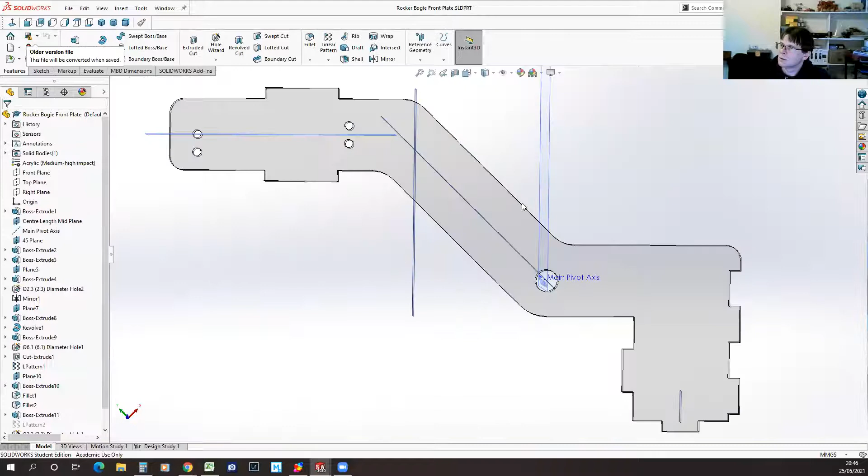Okay, so this was a robot that I designed, and it's all made out of laser cut acrylic. I designed all of the individual parts in SolidWorks. You can see they're all 3mm thick material, but I designed each part by hand to assemble up into the final robot. In fact, you can see it on the shelf behind me in my video. Cool. So that's an example, and the way that I did the laser cutting is I generated drawings.

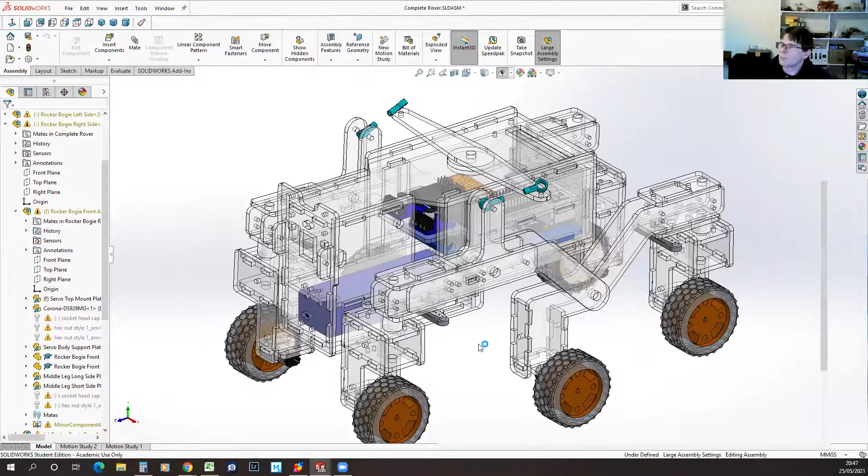And then I could take that DXF file into Inkscape and make any further adjustments that I wanted in terms of layout. So I tended to not try to do the layout in SolidWorks, but take the parts into Inkscape and then do the final layout for laser cutting there. And then I would export the DXF from Inkscape, and that's what the laser cutter at the Makespace would take as its input file. Cool. That makes sense.